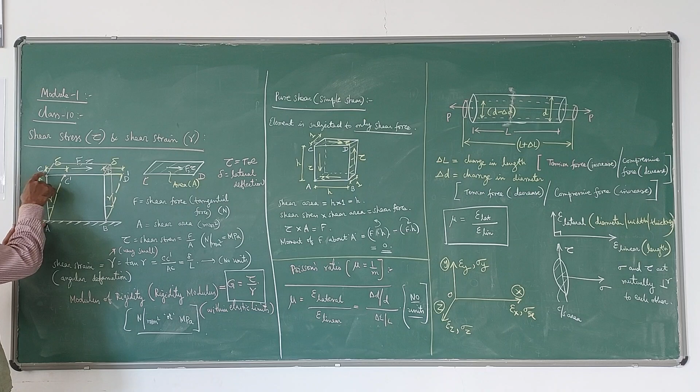Since this gamma is very small, the deformation is very small within elastic limits, so gamma can be equated to tan gamma. In trigonometry, you know that if theta is very small, sin theta is equal to theta, tan theta is equal to theta and cos theta is 1, where theta is in radians. Similarly here, gamma in radians, say 1 degree, is nothing but pi divided by 180 radians, a very small value. So gamma can be written as tan gamma. Tan gamma in this triangle is opposite side by adjacent side, CC dash by AC. So that is delta divided by h.

This delta divided by h has no units, because delta is in mm and h is also in mm. There are no units for shear strain. Shear strain is also defined as angular deformation, whereas linear strain is linear deformation. Now, just like Young's modulus or modulus of elasticity, we are going to define one more elastic constant within elastic limits, called the modulus of rigidity, or in short, rigidity modulus.

This rigidity modulus is denoted by G, or in some books they use C also for rigidity modulus, which is nothing but the ratio of shear stress to shear strain within elastic limits. So whatever definitions and expressions we are giving, Young's modulus or rigidity modulus or stress or strain, they are all within elastic limits. That you have to keep in mind.

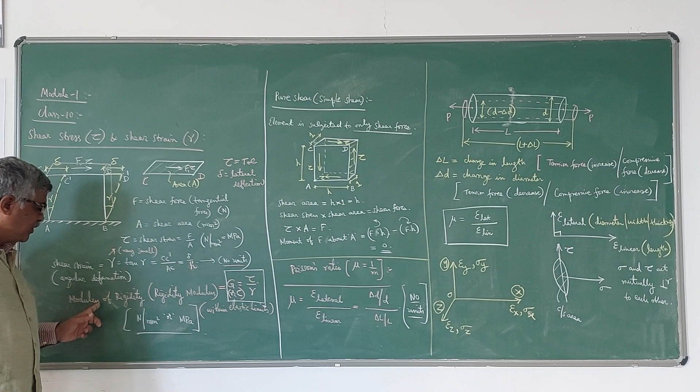And the units for modulus of rigidity are the same as that of Young's modulus, Newton per mm square. Because here tau is Newton per mm square, gamma has no units, therefore G also is in Newton per mm square. Now this is about the concept of shear stress, shear strain and modulus of rigidity. Now we have to know about one more thing called pure shear or simple shear. What do you mean by pure shear?

So if the material is subjected to only shear force, there is no normal force, no tension force, no compression force, no bending force. If it is subjected to only shear force, then it is called pure shear or simple shear. Here I have taken a diagram. ABCD is a block which has some area like this. Thickness I have taken 1. It is of unit thickness, and width and height. It's a square block, so you can take both the height and width as h.

So in that case, the shear area remains the same in all cases. It is h into 1, because the area becomes a rectangle. H into 1, that is h only. Now we know that stress into area gives the value of force, because stress is force divided by area. So here shear stress is tau. Area is the shear area, this hatched portion, that is h, and that is equal to F. Please note that in whatever direction F acts, in the same direction tau also will act, and vice versa.

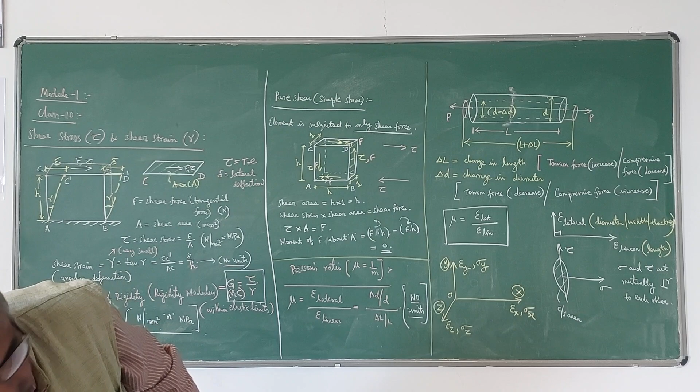Now here, when you take a force or a stress in this direction, naturally for equilibrium, on the opposite side the stress should develop in the opposite direction. Here tau is towards the right, and at the bottom I have taken it towards the left, because these two are in equilibrium. Equal in magnitude, opposite direction, parallel. Therefore the resultant force is 0. Of course, it will have a moment, a clockwise couple, which is F into h, because the distance between these two is h.

Similarly, if I take another two forces, here downward tau, here upward tau. Tau means it is F only; in the same direction shear force F will be acting. These two will give an anti-clockwise couple, F into h. Now one is giving clockwise, another is giving anti-clockwise, so they cancel each other. Sigma M equal to 0 is satisfied. The equilibrium equation is satisfied.

Therefore the moment of the force F about any point in the plane becomes 0. That means it is not subjected to any rotation at all. Such a state of stress is called simple shear stress or pure shear stress. Very important. In pure shear stress, the element is subjected to only shear force, only shear stress will be developed, no tensile stress, no compressive stress, no bending stress.

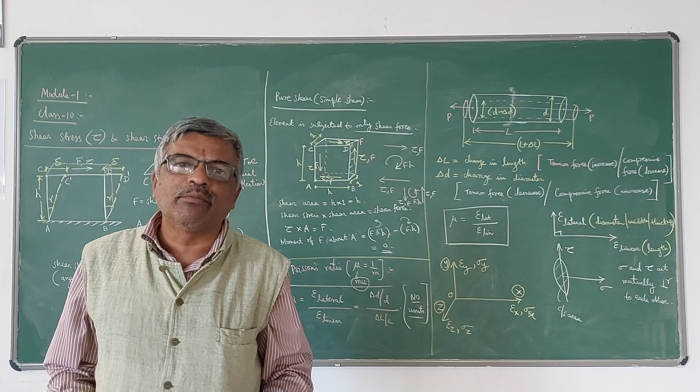This is the concept. Now we have to define one more elastic constant called Poisson's ratio, which is denoted by the Greek letter mu. All are Greek letters: sigma, mu, tau, gamma. Or some books use 1 by m, because it is a fraction, a decimal, and m can be expressed as a whole number. For example, m equal to 4 means 1 by 4, 0.25. M equal to 3 means 1 by 3, 0.33. Like that the mu value is expressed.

How is it defined? Mu is defined as the ratio of lateral strain to linear strain. Very, very important. Of course, this is also within elastic limits. All these definitions are defined within elastic limits.

So, lateral strain to linear strain. You have to understand these two words. To understand lateral and linear strain, I have drawn a diagram here. It's a cylindrical rod, which means the cross section is circular. It is subjected to a tension force P on either side. I have taken the initial length as L.

Since it is subjected to a tension force, there is elongation. The length will increase, and I have taken that new length as L plus delta L. The initial diameter I have taken as d. Then after elongation, I have taken it as d minus delta d because it has reduced. That's why I have used this minus sign.

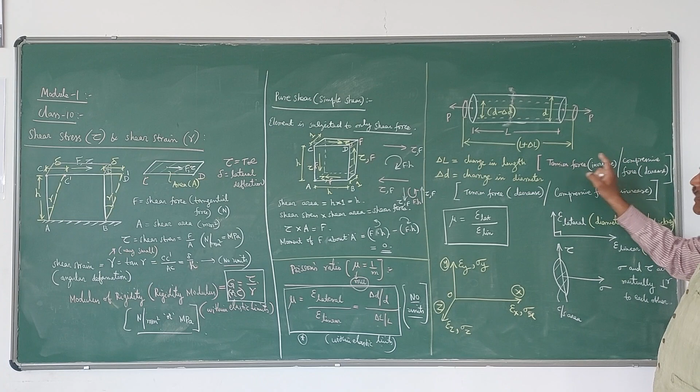Now here delta L is the change in length. This change in length will be an increase in length if it is a tension force. It is a decrease in length if it is a compression force. So if P is compression, it is a decrease in length. Similarly, delta d is the change in diameter, and it is the reverse. It is a decrease in diameter if it is a tension force, and an increase in diameter if it is a compression force.

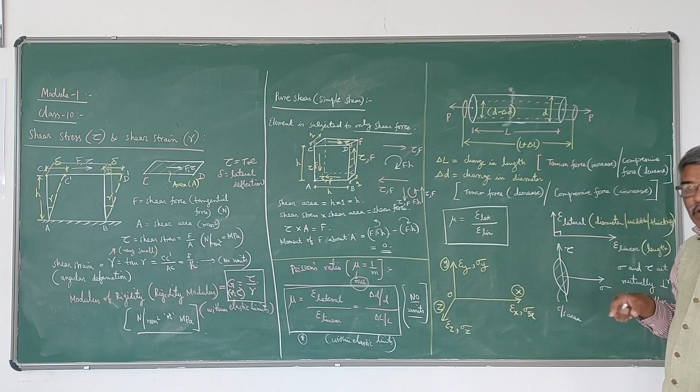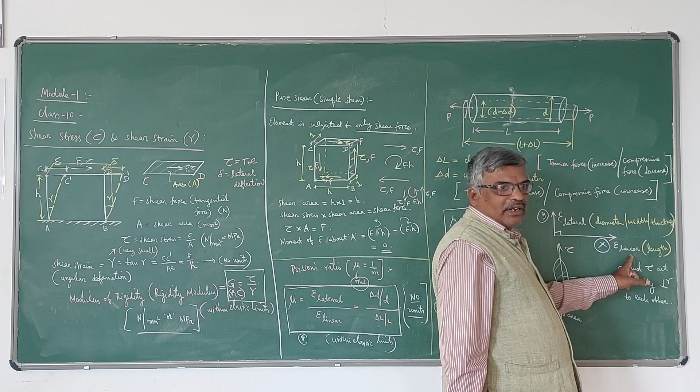Now, take the ratio of lateral strain to linear strain. Lateral strain means the perpendicular direction. See here, I have written it. This is linear, along the length. If you measure, this is the x-axis, this is the y-axis, perpendicular to each other. Along the length, if you measure the strain, that is called linear strain. So linear strain is nothing but delta L by L, epsilon linear.

Whereas along the y direction, the diameter will be there. See, this is the y-axis, this is the x-axis. And of course in the z direction also, it is diameter only. In the case of a circular rod, the x-axis is length, the y and z axes are diameters. So linear strain is delta L by L. Lateral strain in the y or z direction is delta d by d, change in diameter divided by initial diameter.

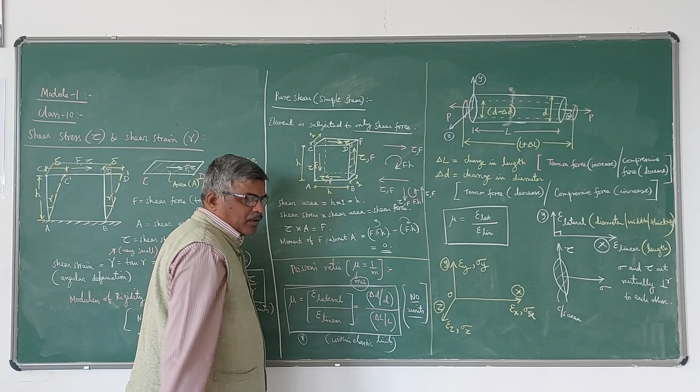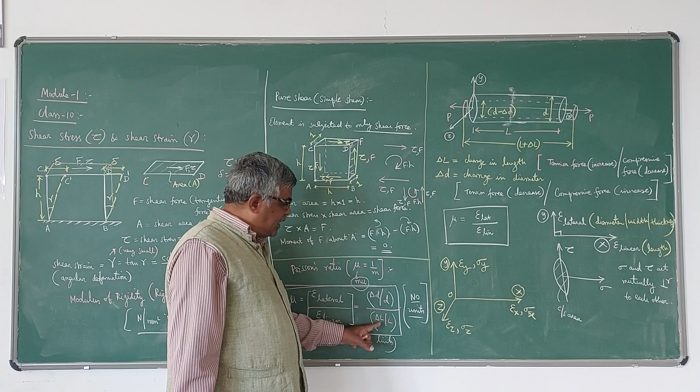So epsilon lateral divided by epsilon linear is called Poisson's ratio. Actually, it will be less than 1. The maximum value of mu is 0.5, and we can prove that. Anyway, delta d by d is the lateral strain, delta L by L is the linear strain. The ratio of these two is called Poisson's ratio, which is denoted by mu or 1 by m.

Here I have shown how the strains will develop. Epsilon x is the strain in the x direction, the corresponding stress is sigma x. Epsilon y is the strain in the y direction, the corresponding stress is sigma y. Epsilon z is the strain in the z direction, the corresponding stress is sigma z. Normal stress is always perpendicular to the cross-sectional area. You can observe here, this is the area, and perpendicular to it is the normal stress, sigma.

This normal stress is either tension or compression, whereas at right angles to it is shear stress, which is tau. Depending on the sign convention, you can take tau as positive or negative; let me discuss that later. Anyway, perpendicular to sigma, tau will be there. That you have to understand. And in this direction also you will have tau, and in the z direction also you will have tau.

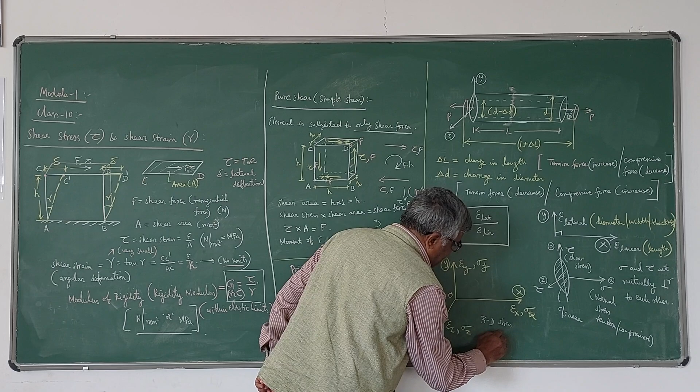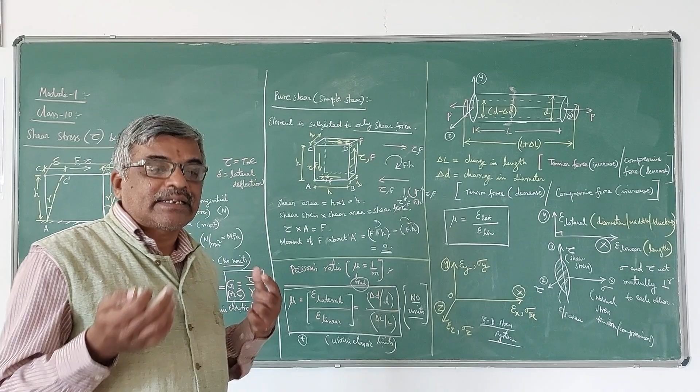So x, y, z. If you take any area, perpendicular to the area there will be normal stress, one value, whereas in the other two directions, y and z, you will have shear stress. So totally it is a three-dimensional stress system, called a 3D stress system. If the stress acts in only one direction, it is uniaxial stress. If it acts in two directions, sigma x and sigma y, it is biaxial stress. If it acts in three directions, sigma x, sigma y, sigma z, it is called triaxial stress.

So if only a tension or compression force is acting, it is uniaxial. If in addition to tension you want to calculate shear stress in one direction, then it is biaxial. In addition to tensile stress, if you want to calculate shear stress in the other two mutually perpendicular directions, then it is triaxial stress. Like that, we have to distinguish between uniaxial, biaxial and triaxial stress systems.